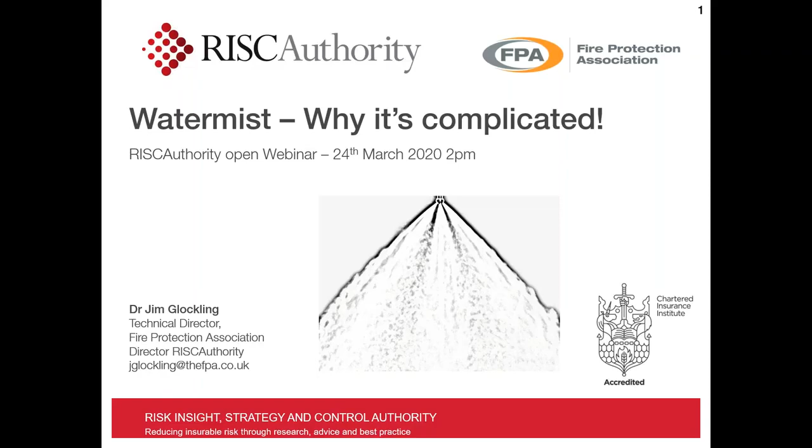Those who know RISCAuthority will obviously know we have a declared bias in terms of business and property protection, in that we seek resilient systems, things which are dependable since they underpin insuring.

Right, so without further ado, the learning objectives, requirement for the certification. We're going to go through what is Watermist, why it's different to other forms of suppression. And I hope if you take nothing away from this, it'll be that it really is different in the way that it operates. And that really underpins why it will always be complicated to specify and to prove.

Also the importance of establishing exactly what the protection objectives are, operational dependencies with other systems, and how your selection might be influenced by whether you're looking for life safety, property protection, or some other remit to fulfill. So often we see this being left out. People put in a suppression system or an extinguishing system without actually really thinking about what needs to be achieved should it ever be required in anger.

We also need to address the issue of equivalency, and this is because when we look at our building regulations and how some suppression systems are referenced, often they will cite sprinkler systems and ask for equivalency if a different type of system is to be used. And that's very important, specifically for those who are protecting the built environment and particularly for life safety objectives.

Now, RISCAuthority has put in a lot of work trying to clarify the situation for people. I'll go into that, and also provide some basic rules of thumb. Now, these are really things which people may disagree with, but we found that they hold true when trying to specify good systems.

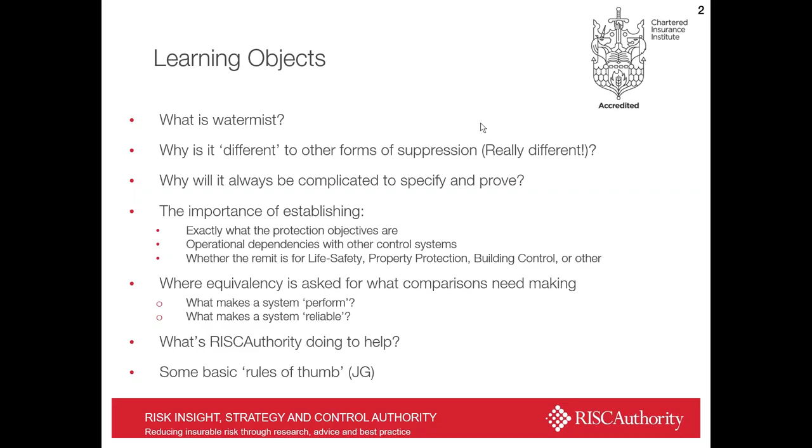So what is Watermist? Essentially, it differs from things like sprinkler systems because the water droplets are very finely divided, much smaller. And in doing so, that gives them an amazing surface area for the exchange of heat and mass. So if you want to change a lot of water into steam very quickly, the first thing you do is cut it up as fine as possible and make it available for boiling off.

This is the difference between a Watermist system and a sprinkler system. In order to achieve this very fine subdivision of particles, these systems generally operate at much higher pressures than other traditional water systems. For this, we might use compressed gas or high pressure pumps.

The mode of operation is generally described as partly thermodynamic cooling of gases during the evaporation process of water into steam, and oxygen reduction as this steam displaces oxygen from the compartment. But many other factors will also come into play, and I'll show you in probably more detail than is healthy during the course of this talk.

These systems can be implemented in a number of forms. Traditionally, they've been what we call deluge systems, where the heads will not have a sprinkler bulb or glass frangible bulb in them, but will actuate on an open pipe system when the pump is switched on. These can be operated on a compartment or local application protection.

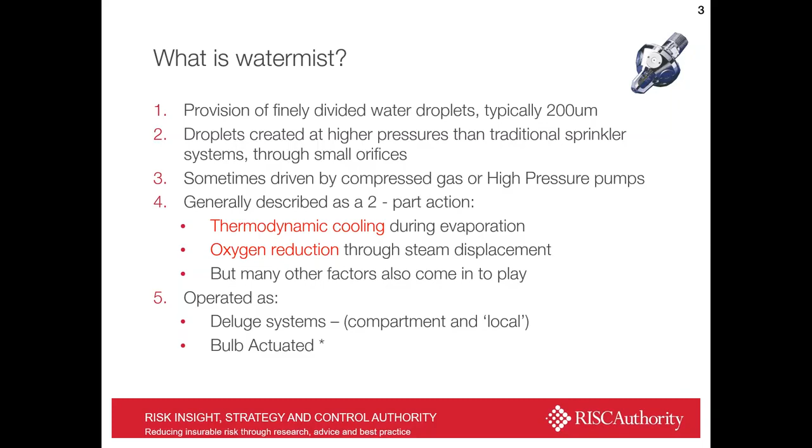So, first of all, why is Watermist different? I do apologise for putting up a picture of the fire triangle - nearly every talk on fire starts with it. But I'll be as succinct as I can.

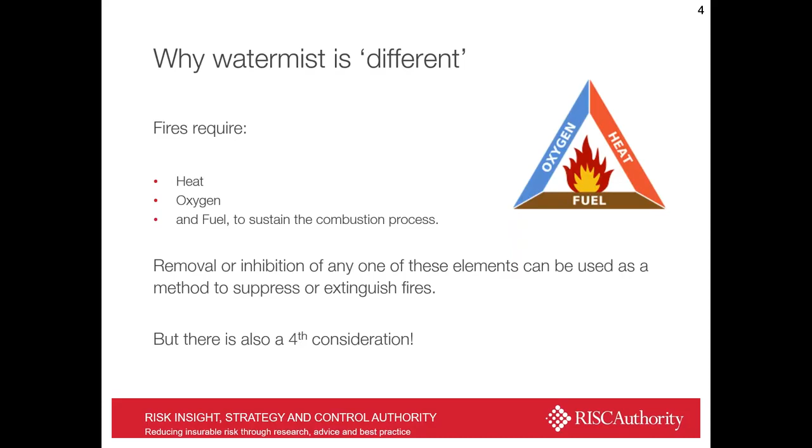We all know that fires require heat, oxygen, and fuel to sustain combustion, and so any suppression system that comes to the fore is going to act on one of those. But it's actually a little bit more complicated than that, because we also need to consider the chemistry of combustion.

So you may be more familiar with the fire tetrahedron. Really this is about interrupting the chemistry of the combustion process itself. Whilst we might be used to our O-level chemistry telling us that hydrogen and oxygen mix to make water in a simple equation, in actual fact, it takes place as a series of steps where bonds are broken and remade between the various compounds involved.

And while they are in this heightened state of being split up, they form free radicals. In suppression terms, there is an opportunity for other molecules to be introduced to steal these, so the chemistry of combustion can't complete. This is probably the most familiar action we'll move on to think about with some of the gases which have historically been used for fighting fire. So we can really address fire by limiting oxygen, limiting heat or fuel, or interrupting the chemistry of combustion itself.

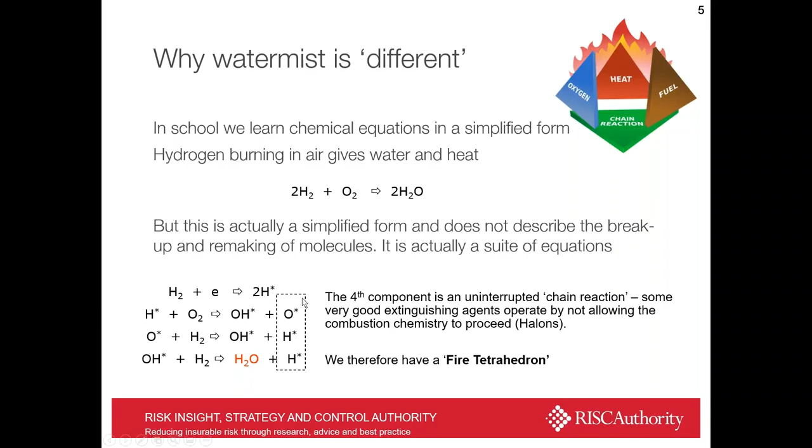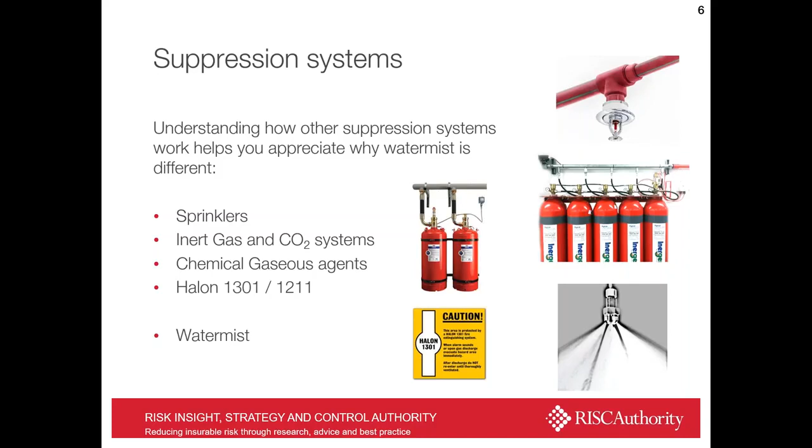Now, I thought it might help to understand how Watermist works by first looking at other suppression systems very quickly - the popular ones being sprinklers, inert gas systems and CO2 systems, chemical gaseous agents, and the traditionally used gases such as halon 1301. This may help us understand a little bit how Watermist works in its own right. So, looking at sprinkler systems, often people are slightly confused about how sprinkler systems work.

We're very used to thinking we put water on fire and the fire goes out. But actually, when it comes to things like sprinkler systems, generally they are fuel removal systems. Generally what they achieve is making stuff that would normally burn, not burn. So in the case of solid fuels like cardboard, dry cardboard is a fuel, wet cardboard isn't. And a lot of sprinkler protection is about pre-wetting the fuel that could soon become involved in a fire.

And that determines how water is discharged from them. Now, if you're protecting some liquid fuels even, this can still apply.

Alcohols mixed with water, at a certain percentage, will burn, and below a certain amount of dilution, they will cease to be combustible. So dilution of alcohol fuels to the point where they become non-combustible still classifies as fuel removal.

For other types of Class B fuels, like petrol and diesel, additional chemicals can be added to the water entering the sprinkler system, such as firefighting foams, which render the fuels non-combustible or separate them from further participation in the fire by a physical barrier, a skin, or a frothy layer. They also remove heat directly from the seat of the fire, but in common practice for sprinklers, the area will burn out where the fire initiates, because you've made the surrounding product non-combustible by the flow of water over it or the absorption of water into it.

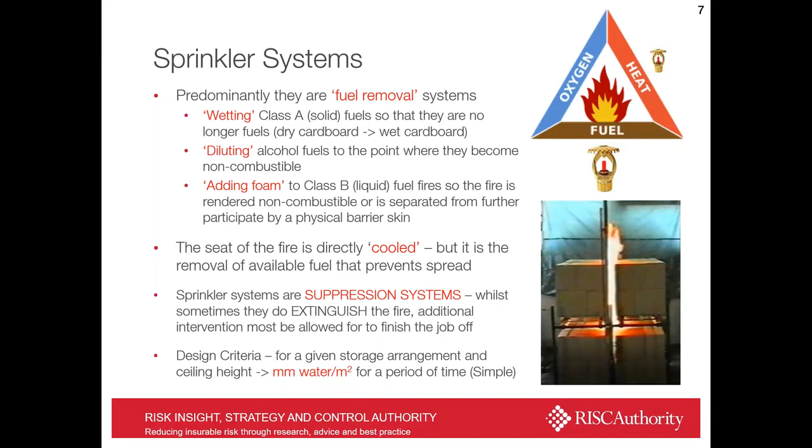If we look at the equivalent for gaseous systems or inert gas type systems, these are oxygen removal systems, where the inert gas displaces around 40% of the enclosure's volume, leaving a residual oxygen concentration that doesn't sustain combustion. For typical fuels, that will be somewhere around 12% oxygen and below. There is some slight variation in performance between different gas mixtures, because introducing additional quantities or changing the makeup of air transports heat differently, so there are some differences in performance between the inert gases, but they are very minor.

Gaseous systems can't really be suppression systems. They need to extinguish the fire in order to fulfill their remit, and for that, inherent in the design will be precise control over the environment in which they operate.

We need to ensure the compartment is sealed so the gas doesn't just dissipate out. We need to ensure that at the time of discharging the gas, we don't destroy the enclosure. When you inject these gases, if 40% of the compartment's volume needs to exit, it needs to do that in a manner controlled to an appropriate location and that doesn't raise pressures inappropriately. Then, having discharged it, there need to be mechanisms to seal the enclosure and ensure you can hold on to that gas quantity.

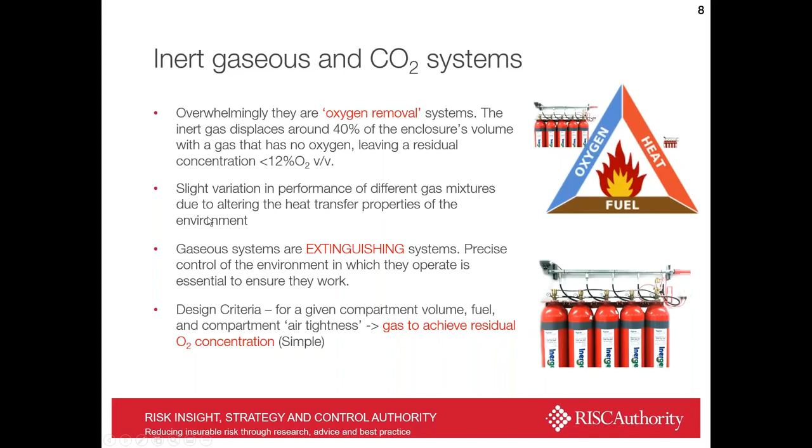So, very straightforward, but a little more complex with chemical gaseous systems. These are, if you like, a gaseous version of water, in that they can remove substantial quantities of heat by breaking down chemically within the fire. It's a highly endothermic reaction, and there are reports that some of these chemicals also inhibit the chemistry of combustion. Popular trade names you might have heard of these types of gases might be FM200, FE13, NAF-S3.

Many are becoming slightly less desirable due to the greenhouse gas contribution they can make. But these are extinguishing systems, and they need to extinguish the fire to fulfill their remit. Because generally they're fluorinated compounds, if you don't extinguish the fire with these chemicals, it can lead to massive production of hydrogen fluoride, a very toxic and damaging gas. But the design criteria is very simple: for any given compartment volume, fuel, and sealing level, you're just looking to achieve a residual agent concentration of a certain value. So again, very simple design.

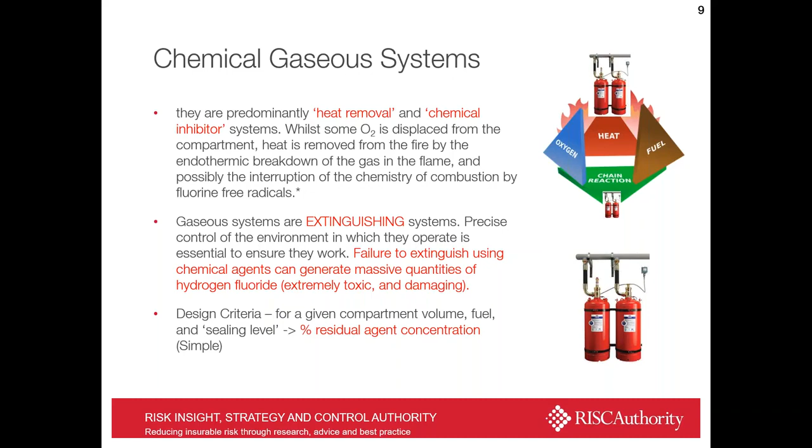And just for completion, halon systems. Halon gases were highly revered chemical inhibiting agents, which in terms of efficiency and performance at putting out fires were quite unsurpassed in their capability. They're now outlawed under the Montreal Protocol because they're ozone-depleting gases. It was their cessation that really led to the development of the other gaseous systems we've just discussed, and also gave birth to increased interest in the use of water mist, prompting a great deal of research into this. The design criteria for halon was again very simple.

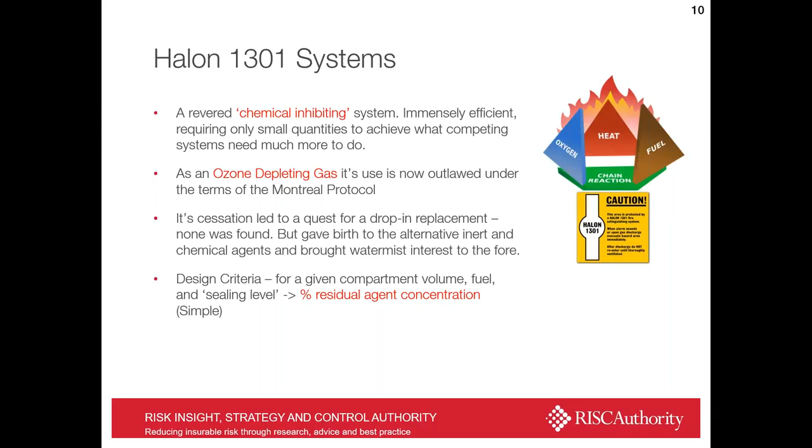So what about water mist? Perhaps it's best described as though it's an inert gas system, but in this case the inert gas is steam, and that must be created by the fire itself. It's this complexity that makes it different from any other extinguishing system, because how it works, how well it works, and the way it works is driven by the fire itself, and not just by the fire, but the relationship the fire has with the enclosure it's within. Scale becomes a very important factor here - a big fire in a small compartment might behave very differently to a small fire in a very big compartment, and even during the life cycle of the fire, these properties can change as it grows and shrinks.

Now, in sealed environments where the fire and geometry allow it, it is most certainly an oxygen removal system, and you can achieve great things where the steam displaces oxygen from the enclosure until combustion can no longer be sustained. It can be an extinguishing system, but this can be very difficult to ensure due to the level of control you need over the environment and how everything goes. I'll demonstrate that clearly shortly with some results from experiments we conducted to show these points. It's obviously a very effective gas cooling system.

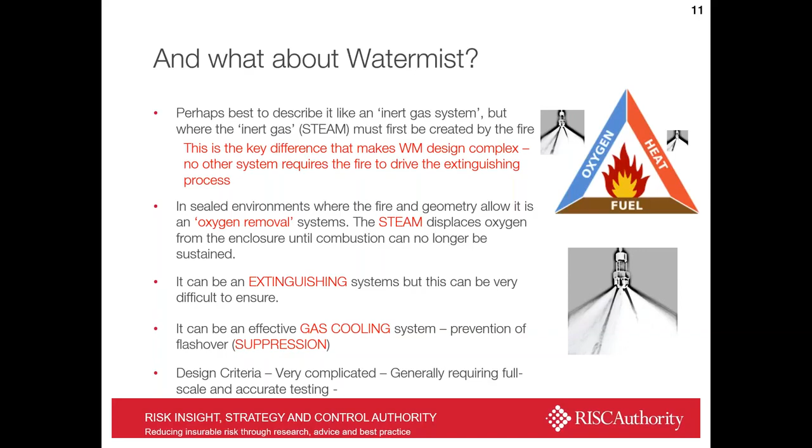We do see that cycling of fires during water mist discharge is commonplace also, as a large fire can really drive itself to the point of its own destruction, or nearly so, but then as it shrinks down it starts to generate less steam, and then, depending on the ventilation arrangements, it may recover quite considerably also.

But another common question is, is it like a sprinkler system or a gaseous system? Sometimes all I can say is it's a bit more like one than the other, but again it depends very much on the situation. The key difference is that the fire and its relationship with the enclosure drives the extinguishing process, and all these things vary.

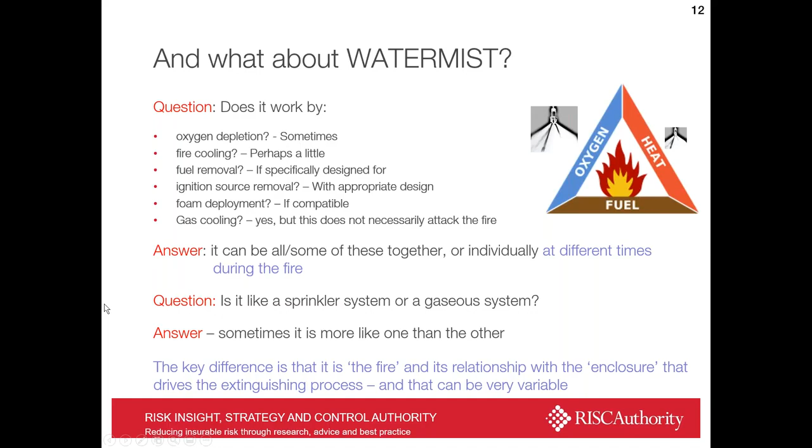So I said I would give you a good example on some of these facets. Here was a very simple series of tests, but very well controlled, in a 100 cubic meter enclosure, a very well sealed rig, but we can adjust the ventilation by removing sections of the door panel, the blue blob on the left with those dots. We can operate with different numbers of watermist nozzles, use a range of fire sizes, and allow the fire to burn for different periods of time before the watermist system operates. Hopefully the results will show you clearly how counterintuitive some of the operating modes are.

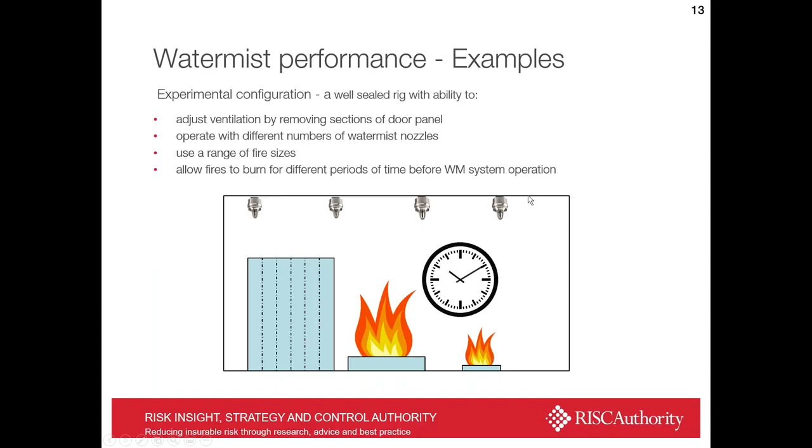So if we look at how long the fire has been burning and how that affects performance, there are two graphs here. On the left we have the temperature in the enclosure, T0 is when we release the watermist system, and on the right we see the oxygen in the compartment itself, with two oxygen sensors in there.

What we have here are two fires which are identical, with identical ventilation conditions. The only difference is that we allow a pre-burn time, a detection time, to be longer for one fire than the other — you see that in the solid black line on the left-hand graph. The consequence of burning for longer is that the mean temperature of the enclosure is higher, 295 degrees as opposed to 258 degrees.

The other consequence of allowing a fire to burn longer is that it consumes more oxygen from the enclosure before the system operates than a shorter pre-burn time. At its lowest, high up in the compartment, it reaches about 8% oxygen, just over, whereas with a 3-minute pre-burn time it's 10%. When we activate the system, we see a difference in time to extinguish: burning the fire longer extinguishes it in 10 seconds, whereas a shorter burn time takes 45 seconds to go out.

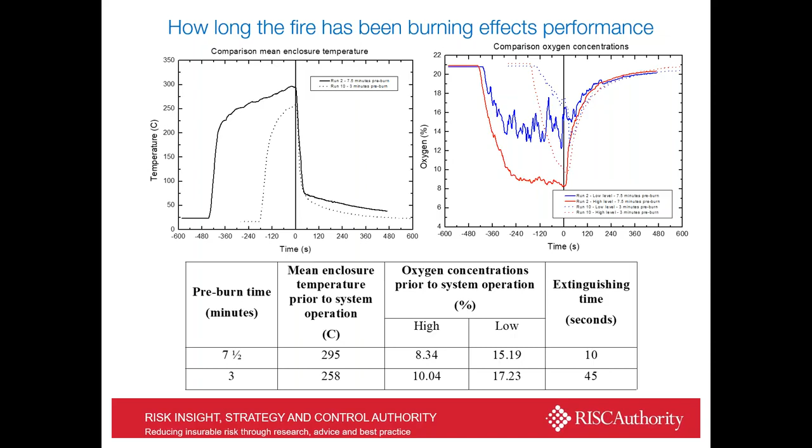Hopefully that's all very logical, but again counterintuitive. We're rather used to detecting and tackling fires earlier because they're easier, but here's a case where leaving them longer makes them easier to extinguish for this type of system.

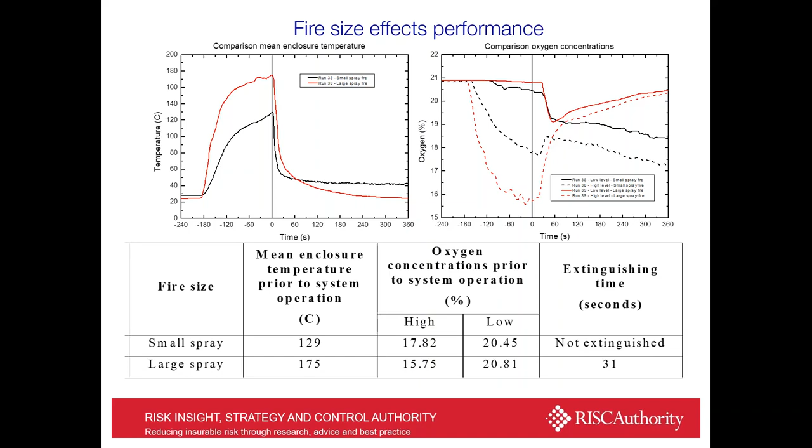The difference here is not just a change in time — for this ventilation configuration, it's the difference between extinguishing the fire and not extinguishing it. This is again a deviation from what we're used to. We're used to systems which don't behave in a binary fashion; we like to see a change in performance, but not a major difference such as whether it gets extinguished or not.

Ventilation is another key feature for systems such as this. We can see they're inherently linked, in their ability to put out fires, to the oxygen content of the enclosure and how they can drive it down. So here, if you remember the schematic before, I've removed a series of vent panels — 2, 4, 6, and 8. What that changes between these tests is not only the temperature of the enclosure, because the fire burns less efficiently.

We can see that in the left-hand graph — actually this is more about holding on to heat, with the highest temperatures for the least panels removed. But more importantly, on the right-hand graph, it describes the residual oxygen concentration within the compartment for the different ventilation levels. As we increase the ventilation of the compartment, you can see the extinguishing time increase from 14 to 27 to 35 seconds, to the point when 8 panels are removed, it doesn't extinguish at all. So again we reach a threshold, and it's a question of whether we'd be able to describe accurately in any design manual when this happens, if extinguishment is an important facet of the overall design.

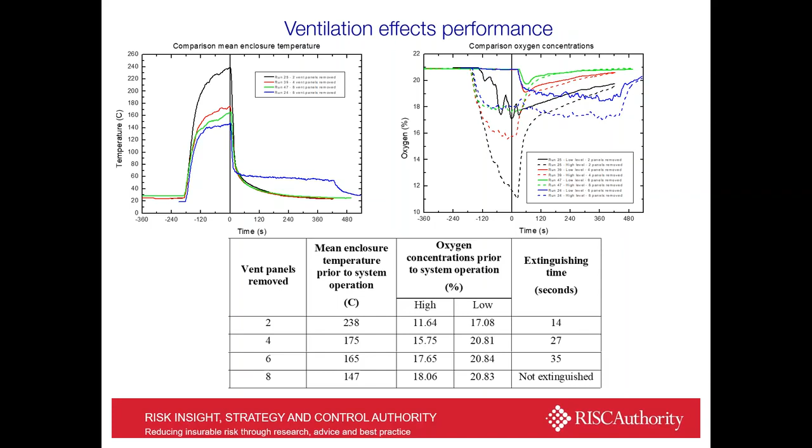And that's another thing we need to discuss later in this talk — people do seem to fixate on extinguishing fires, when actually that might not be what is needed at the end of the day.

Watermist density - we can also change the number of nozzles operating within a compartment in this well-controlled environment. You can see as we change from 4 to 6 nozzles on small and large spray fires, not surprisingly, the more water you put in, the lower you can drive down the oxygen content of the compartment. Larger fires do that better.

We've already seen that. But on a small spray fire, with 6 nozzles operating, the fire will be extinguished in 52 seconds. But if it comes down to just 4 heads operating, we reach a threshold where the fire doesn't extinguish.

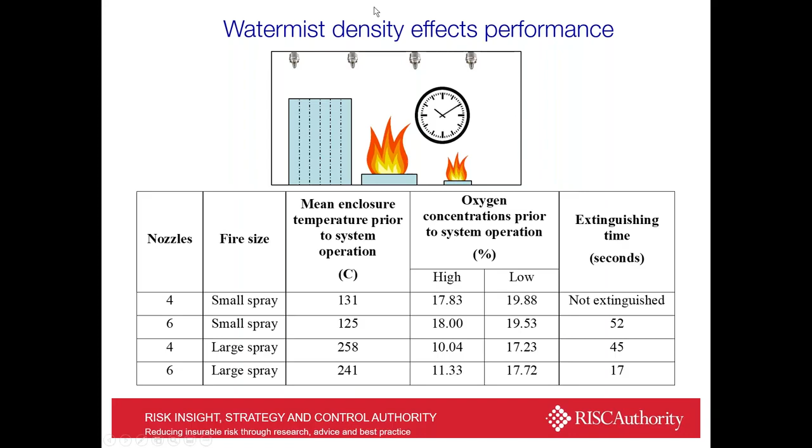So hopefully you've managed to get your head around that - it is confusing. It demonstrates just how confusing things can be. Fires that have been burning for longer are hotter and have less oxygen available, and may therefore be easier to extinguish. On the other hand, fires which are bigger are hotter, consume more oxygen, and can generate more steam, and again may be easier to extinguish.

Fires with less ventilation cannot replace the oxygen displaced by steam as quickly, and may therefore be easier to extinguish. And fires subjected to more droplets can produce more steam, which may benefit extinguishment also.

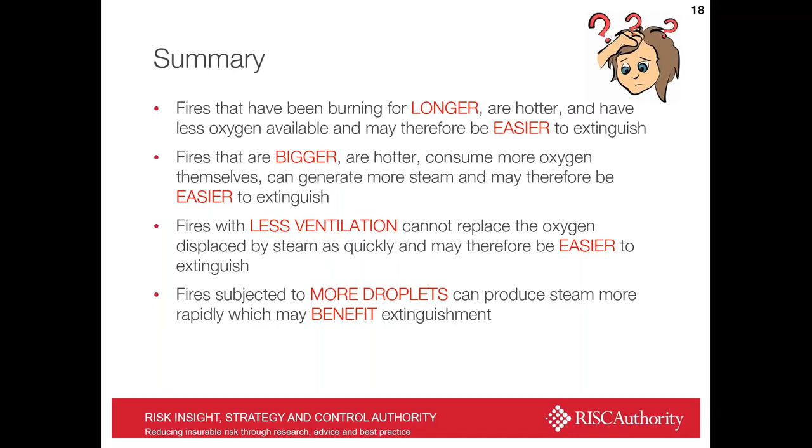So the problem with criteria like this - longer, bigger, less ventilation, more droplets - is these are very difficult things to describe in any given design manual, because they are related to fire size. A big fire is only big in a compartment in which it looks big. In a much larger compartment, it may be a very small fire. So it's this interplay that makes it very complex indeed.

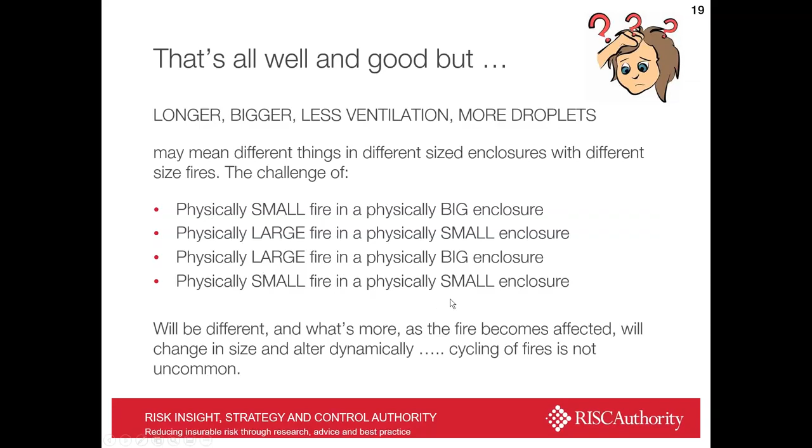But I think we've probably laboured that point long enough. I just want to show you what this actually looks like in practice. This is some work we did for the military, and I want to show you 3 examples. This was for a very specifically designed Watermist system for them. I'm hoping this will run.

This is where it worked beautifully in rehearsal. But we might be having a little problem now. Sorry about that - I may just have to describe these to you.

Basically, in a very large compartment, this was for a marine application - we designed a system for the military, for warships. In the first video on the left-hand side, that should have been showing you how hidden fires, under a metal table, are tackled. These images are taken with thermal imaging cameras - a very large fire in a completely obscured situation. If the fire is large enough and the compartment is well sealed enough, that fire can be successfully tackled because of inerting of the atmosphere and reducing the oxygen to a point where combustion can no longer be sustained.

In the middle one, this is a small fire, but in this case the ventilation of the enclosure is such that the small fire will not go out by itself. This particular Watermist system was enhanced with foam, so that gets taken care of by foam.

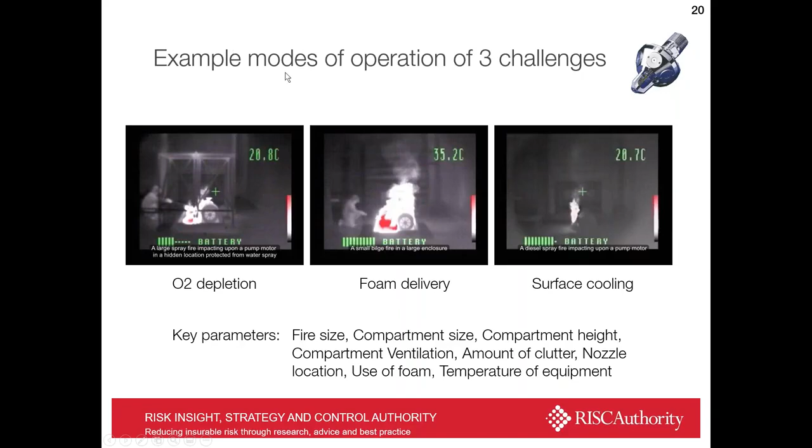And I also don't, oh, there we go.

To recap, a very special set of circumstances need to exist for water mist to extinguish fires effectively, robustly, and reliably, but they are very good at cooling and preventing flashover. Suitability can therefore be very different for different applications, and whether extinguishment is a requirement or not.

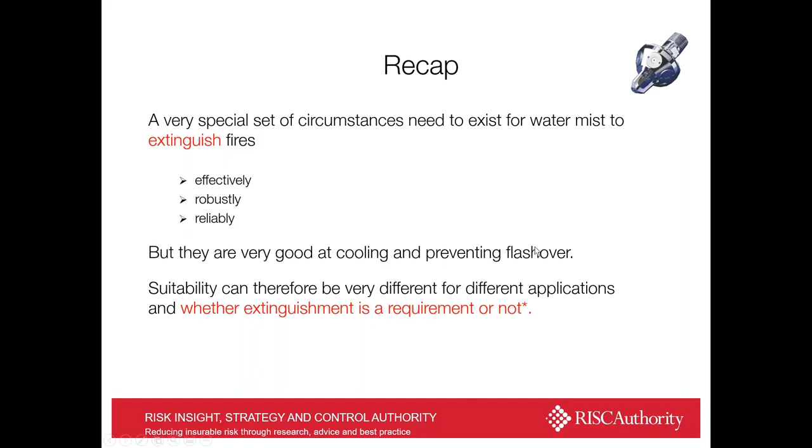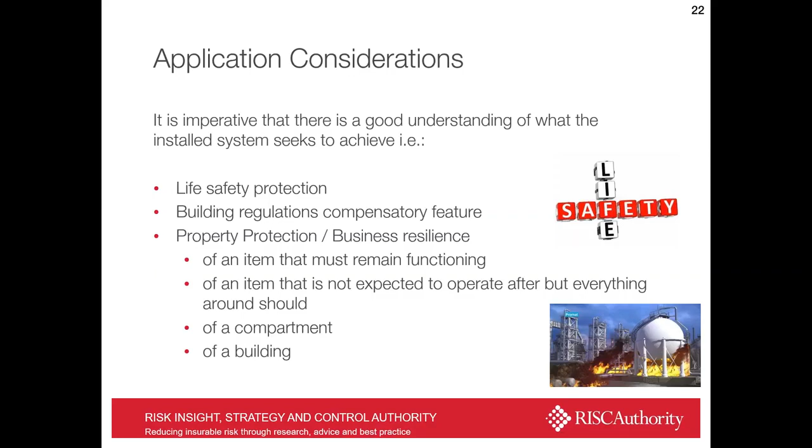We need to consider this very carefully. Water mist is seeing a wide range of applications, some more familiar than others, but it's vital that you understand what it seeks to achieve. I've roughly categorized these as life safety protection, building regulations compensatory feature, property protection, and business resilience endeavors. That might be an item which must remain functioning, local application if you like, or an item where it may be destroyed in the process, but that's okay as long as everything else around stays intact, or protection of a compartment or protection of a building.

For each of these, it's imperative to also consider if extinguishment or suppression is appropriate, and if we talk about suppression, how long the system must be effective for. This is generally a conversation about who's coming up to help with it - the fire service, or what the secondary measures are coming to finish off the fire - and also how resilient the system must be to perform.

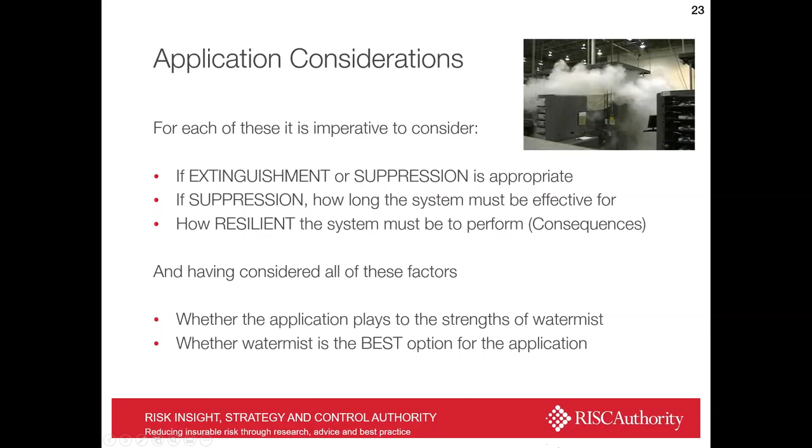Having considered all those factors, we need to assess whether the application plays to the strengths of water mist, and we'll talk about those in a moment, and whether water mist is the best option for the application itself.

I think hopefully you start to get a good handle on what the strengths are of water mist. Very good on high heat output fuels, particularly liquid fuels, hot environments, enclosed environments - this optimizes steam production and containment of that steam for displacement of oxygen as well. Best for small compartments with low ceiling heights, because that can also maintain the momentum of the droplets themselves.

Around a fire, there are a lot of repelling forces to drive droplets away, and water mist systems overcome this by generally injecting them in a fairly fast and furious fashion so that they can overcome these repulsive forces. Certainly a strength is direct application, very good environmental cooling, and they can be good on hidden fires if the fire is large enough and the compartment small enough in relation to each other to globally reduce oxygen content, and they're very good at gas cooling.

The weaknesses: ventilated spaces, as hopefully we've demonstrated there - you can cross a threshold so that a lot of the benefit disappears all too quickly. High ceiling heights, where the momentum of the droplets gets lost with distance. Small fires can remain remarkably resilient against water mist systems, because they don't have the energy to drive the circumstances for their own demise.

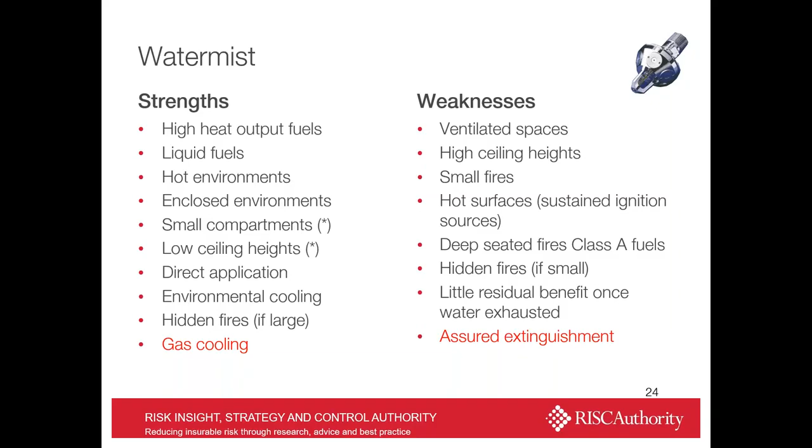They're not necessarily very good at cooling hot surfaces, not necessarily very good on deep-seated fires in Class A type fuels, which, as we know with sprinkler systems, might require wetting the fuels. Hidden fires, if small. Another thing to consider is that once the water supply to a water mist system is exhausted, there can be little benefit thereafter, because such a very small quantity of water has actually been put down. Their weakness is really that assuring extinguishment can be quite a challenge, and we'll keep revisiting that.

But that said, for life safety purposes, we've seen some very good implementations. We know that they have the facet of exhibiting excellent atmospheric cooling, very good for flashover prevention, and really preventing fire growth in small domestic residences. It's an aid to timely detection and evacuation, and generally these are specified without an expectation or requirement for property protection, as extinguishment is not required. It's more about getting people out of the building, and they can do that very effectively indeed.

Obviously post-Grenfell, they've been proposed as a good measure for assisting the escape of occupants who can be quite remote, high up in high-rise buildings, and we've seen some good examples of where that certainly is a feature.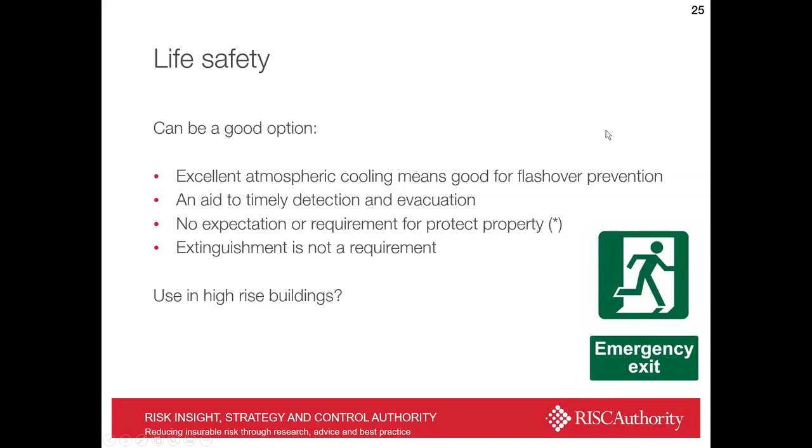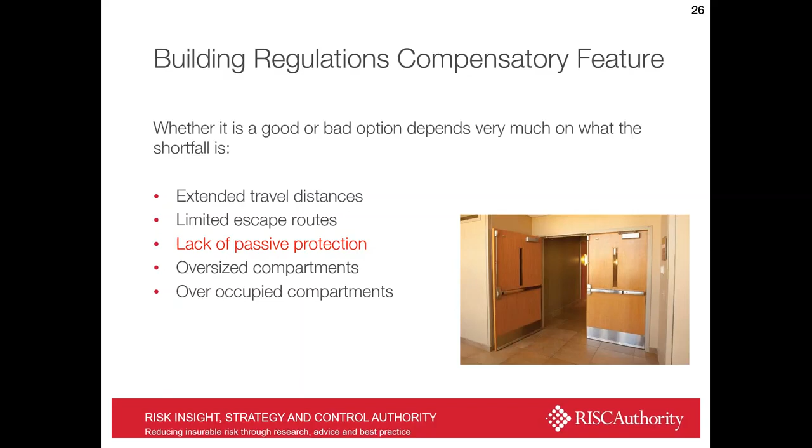Now, building regulations compensatory features. This is where the building regulations can't necessarily be applied in full, so other measures are made to compensate. These may be things like extended travel distances, limited escape routes, just single stairwell, lack of passive protection—very topical at the moment—oversized compartments or over-occupied compartments. I think decisions as to whether Watermist is appropriate here really depend very much on considering each of those in turn for appropriateness, given the strengths and weaknesses of what we've already discussed. But I won't dwell on those. It's a very complex area in its own right.

In terms of property protection, for local application property protection—that is protecting an item of equipment—Watermist is often the very best option. In some marine and high-risk environments, it's a good option too. The reason there is quite obvious: in the marine environment we have very well-sealed compartments, and the fuels they use generally lead to very large instantaneous fires. It all plays to the strengths of Watermist, as we've seen it being very effective.

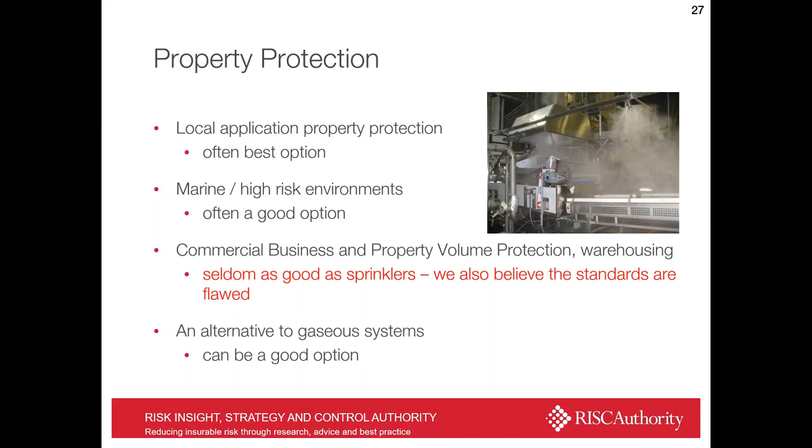The grey area, I would say, comes when we look at commercial business and property volume protection. These are really the domain where sprinklers are used—warehouse storage and the like. This is where we see most challenges, and often we see them putting in facilities where really sprinklers would have been a better choice after all. I'll go on to some of the reasons for that later on. But certainly they can also be considered as a practical alternative to where gaseous systems might be deployed. They can be a very good option, subject to the fires being of the right type to play to its strengths.

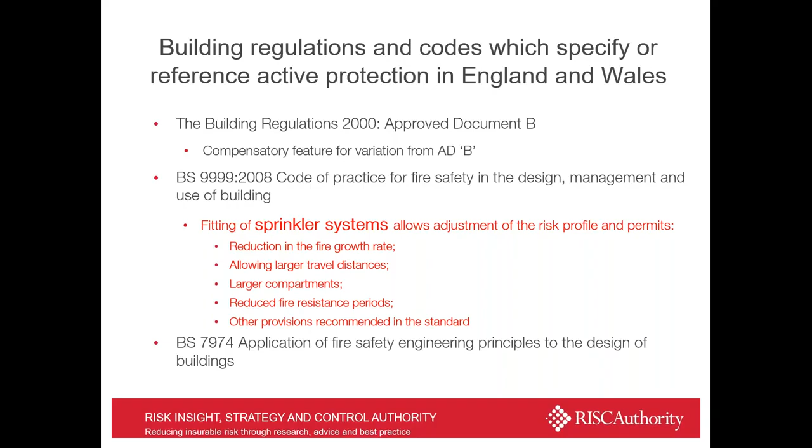I won't dwell on this, but building regulations do talk about water systems, generally in terms of sprinkler systems, as we said before. They can be used to compensate in various codes, to reduce the fire growth rate, allow larger travel distances, larger compartments, reduce fire resistance periods, etc. And where they have been mentioned—this is a phrase out of BS 9999—it says where it is proposed to modify the risk profile by using a fire suppression system other than a sprinkler system, it will need to be demonstrated that this system achieves the equivalent standard of fire protection and reliability.

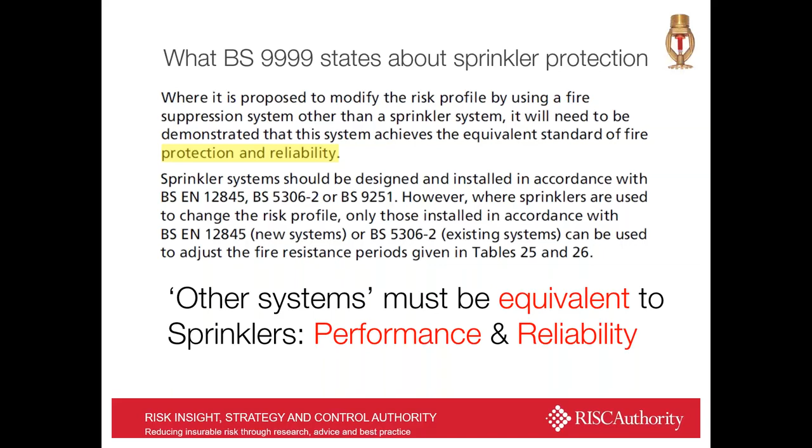Now, the fire protection bit is quite easy to generally demonstrate in the laboratory—you can tweak and play with any system to make it good. But reliability is a very different thing altogether, and that is generally earned through really kind of over the years of refining, tweaking to increase the development of pedigree, I suppose, of a system. But if we hold on to that thought, we probably need to consider what makes things reliable.

Now, I don't want to enter into a sprinkler versus Watermist debate, but it's sort of inevitable in some respects to visit here. It's a good benchmark because sprinklers probably are the most reliable suppression system that we have. Generally, when asked to operate within the figures, most analysis show them to be over 90%, 96% likely to function properly when called upon to do so, which is an enviable figure which no other type of suppression system comes close to. But in the early days, sprinklers weren't perfect either, though most problems have now been resolved.

By specifications for equipment, specified clearances between moving valve parts. It's often a criticism that sprinkler systems look like Victorian architecture, but it's with good reason—that actually brings resilience into their whole operation. Size limits, minimum size limits on various orifices, and that overcomes a lot of the water quality problems that we have. But 8 millimeters—these are quite large orifice sizes.

Continuous refinement of how we design systems and install them. Certainly RISCAuthority alone spends hundreds of thousands of pounds trying to refine our rules to maintain this level of reliability of the systems. They have good specifications of how to design against a range of hazards, and water supplies are very secure, reliable, and incorporate duplication also.

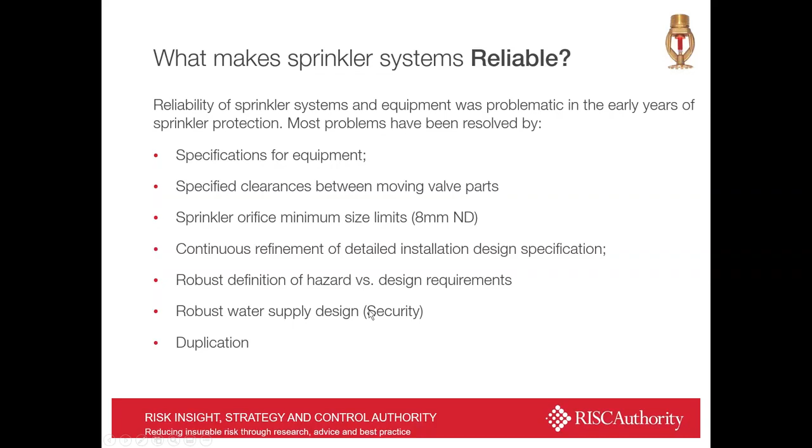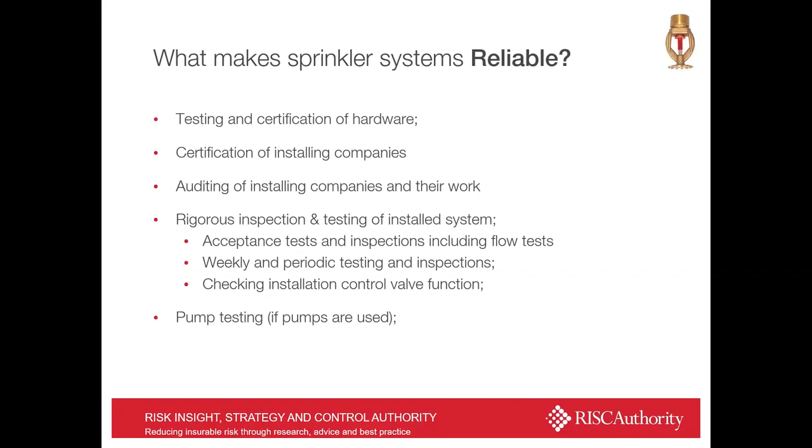There's also testing and certification of hardware, certification of installing companies. There's auditing of the installing companies through things like the LPS 1048 schemes and FIRAS schemes. There's also rigorous inspection and testing of the installed systems by way of acceptance tests, flow tests. There are weekly tests done, pumps are run up each week as well, and there's checking of installation and control valve function. So as you can see, it's an all-through-life solution that has been required to produce reliability within sprinkler systems. But even then, we still find problems, albeit rarely, but it does take a lot to achieve these levels of security.

I just want to do a few side-by-side comparisons. Probably one of the primary differences between sprinkler and Watermist systems is actually the extent of protection.

When I'm confronted with people saying they don't know whether to put in a sprinkler system or Watermist system, it's more than just talking about the technology and methods with which it puts out fires. In specifying a sprinkler system, you are signing up to a list of rules that tells you every area of the building that has to be protected, even the hidden areas, the voids, the cavities, if they contain combustible things. It is basically a total building protection system you're signing up to, not just the fact that you're using a nozzle that puts out big drops.

But when you specify a Watermist system, it really is for compartment protection, and generally it's down to the user to determine what areas, what subcompartments of that building should be protected. So there is a key difference there.

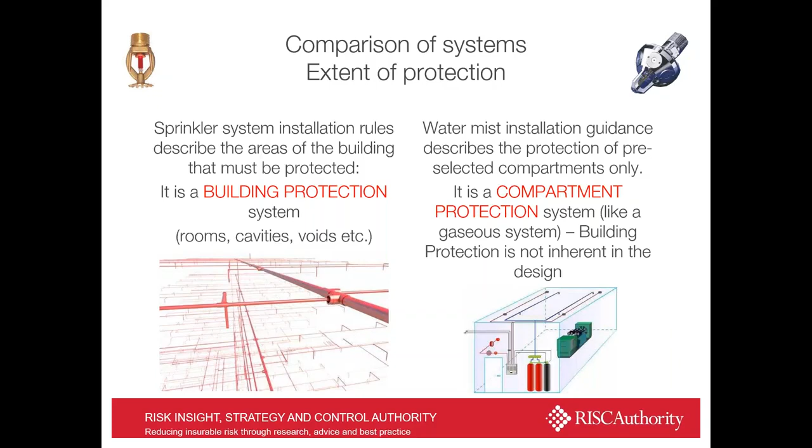With a sprinkler system, if you see one in a building, you'll know that if there are voids over a certain size with combustible content, the sprinkler system will be running in those invisible places too. The same is not inherently encompassed in Watermist design by default.

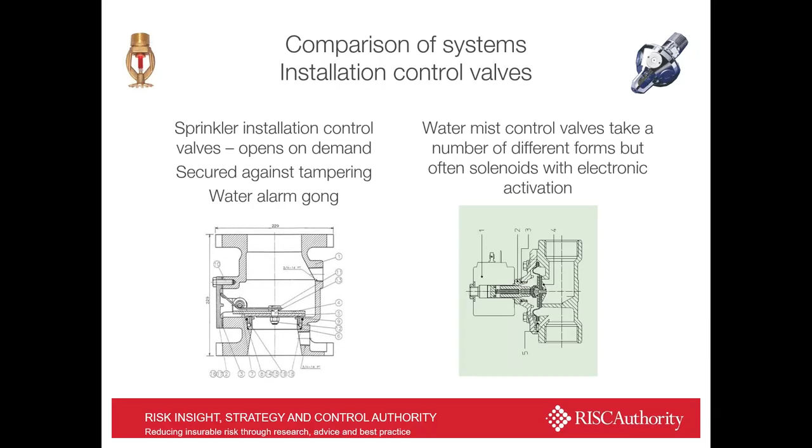And when you look at the hardware that's used as well - I mentioned Victorian architecture on the left-hand side, that's a cutaway of a sprinkler control valve, a large flap that lifts away, generally revealing a hole around 4 inches in size for the water to get through. Watermist systems require much lower quantities of water, but depend on much smaller orifice type equipment such as solenoid valves, which have a much higher failure rate than sprinkler alarm valves.

There's also looking at orifice sizes themselves. We mentioned the minimum orifice size for sprinkler systems is around 8 millimeters, and as such, they get tested every 25 years, and the products are interchangeable. If your system's heads need replacing, you can go to any number of manufacturers and put their head in place of it. Watermist nozzles have very much smaller orifice sizes, and we know in our laboratory, even trying to be fastidiously clean with our water, we do get issues occasionally, and as such these need testing every 3 years, and they're not interchangeable between systems. You do need to go back to the original OEM provider for nozzles if more are required.

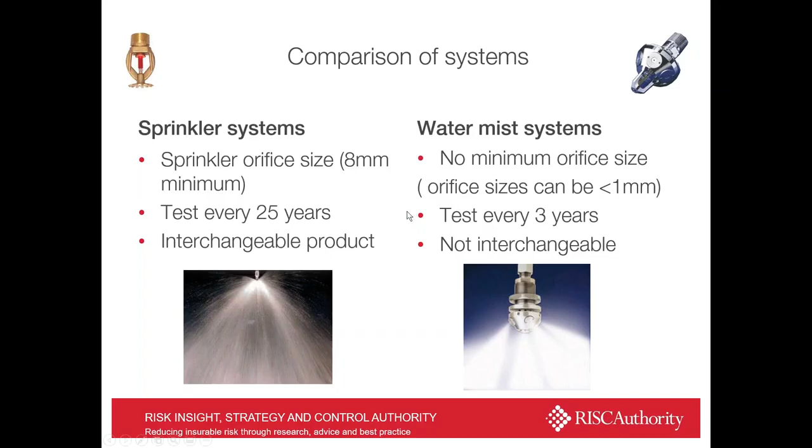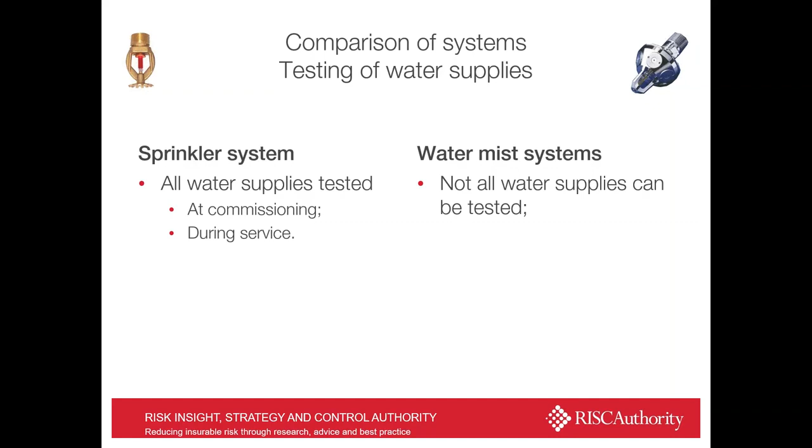Testing of water supplies is also a difference. Sprinkler systems are designed so that we can test the water supplies, and they are tested regularly, and with Watermist systems we find sometimes that's just not possible.

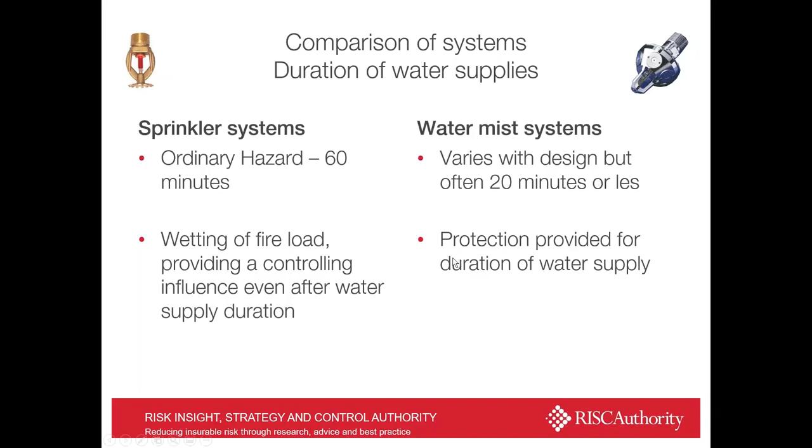Duration of water supplies, obviously for a sprinkler system, is defined by the hazard, but 60 minutes, 90 minutes, even 120 minutes are not out of the question. And even after that water gets exhausted, were it ever to, the amount of water that's gone down can still have a controlling effect on the fire. In Watermist systems, the durations are generally very much smaller. They may be defined by a standard, but often by the installer or manufacturer themselves, determined through testing. But in putting so little water down, once the system generally finishes firing, there can be little residual protection of that space thereafter, if nothing else has come along to intervene.

And then finally, water application rate - we've got it specified against hazard for a sprinkler system, and as I've already described, it's really dependent on the system itself for Watermist, as few equivalent type test procedures apply.

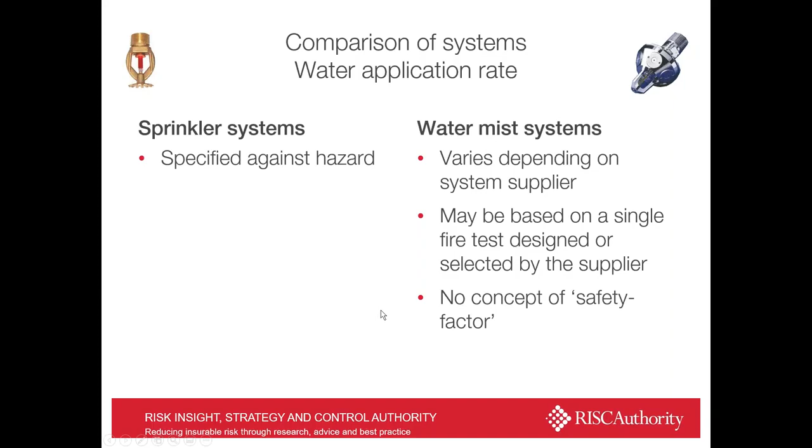So, sorry, in that slight whirlwind, I hope it wasn't too confusing - look at what makes reliability and performance. Currently there's little by way of codes or standards to ensure Watermist systems will have many of the features that we know make sprinkler systems effective for the long-term protection of property and business.

I have seen justifications of Watermist systems which have basically said that sprinkler systems are made of a tank, a pump, lots of pipe work and the nozzles, and they're 96% effective. Our Watermist system essentially is made up of a tank, a pump, some pipe work and some nozzles, so we can infer the same level of reliability. Totally wrong, but I do see it written down occasionally.

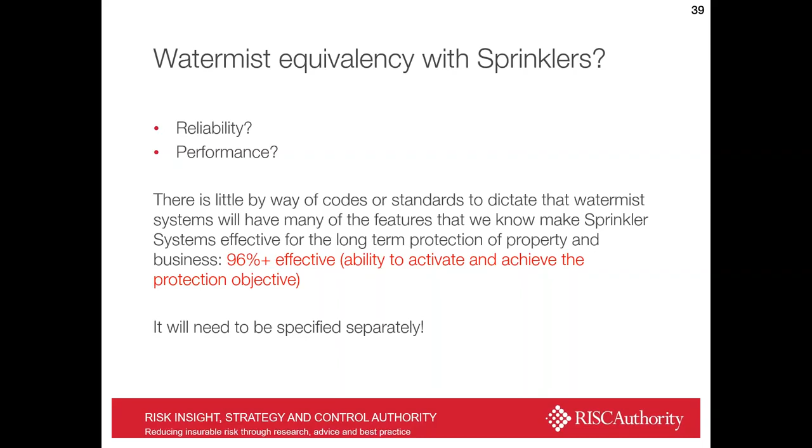So what's RISCAuthority and FPA done about this? Insurers, and many of you are listening in I'm sure, sought some guidance as to how we could help while there is a lack of guidance out there.

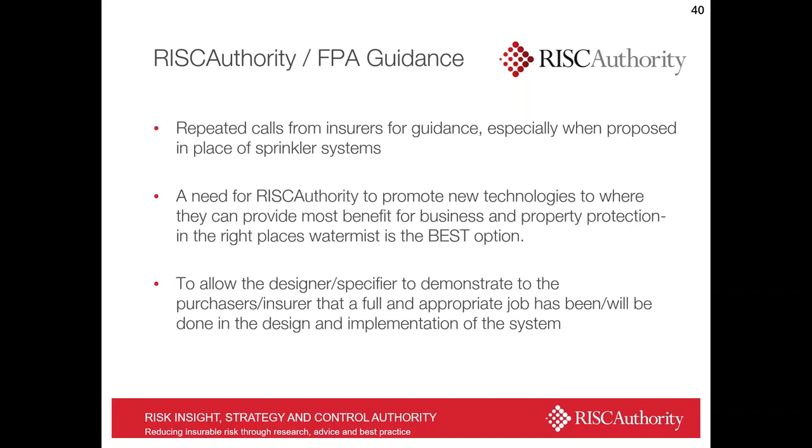RISCAuthority does have a remit to promote new technologies where they can provide most benefit for business and property protection, and we like to see it go into the right places where it's actually the best option. And what we've produced are a suite of questionnaires which hopefully will allow designers and specifiers the freedom to really demonstrate to the end user why this is the best technology to use at any given time.

These are freely downloadable from the RISCAuthority website. There are three of them to cater for the three types of Watermist system that we see being installed.

IQ1 is a Watermist questionnaire for building compartment deluge systems, so that's the use of open head nozzles used to protect compartments in the same way that a gaseous system might be used. These are typically things that we see in some factory environments, but certainly greatly in the marine environment. IQ2 is a Watermist questionnaire for local application systems, protecting deep fat fryers and cooking equipment, which can be very effective there. And IQ3 is a special one.

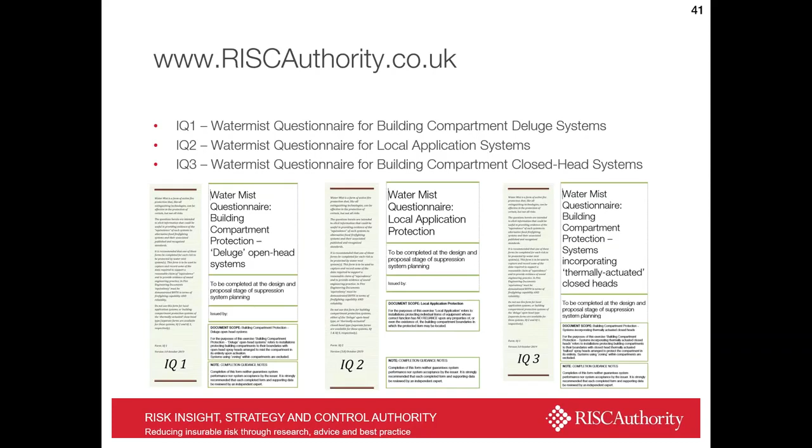This is a Watermist questionnaire for building compartment systems which use closed head systems - these are things with bulbs in them. And there's some very good reasons, which I'll explain very shortly, as to why we think that's important.

Why have we done questionnaires and not produced guides or installation rules? Well, Watermist function is complex, as you've seen, and there are fewer standards than there are for sprinklers existing to rely on for their installation. The science is quite complex here, and to describe every eventuality is almost impossible. But what the questionnaires do is they check that all the design elements have been considered, that the usual risk control logic has been followed, properly recorded, and is owned by someone. We felt that was the only practical approach to take.

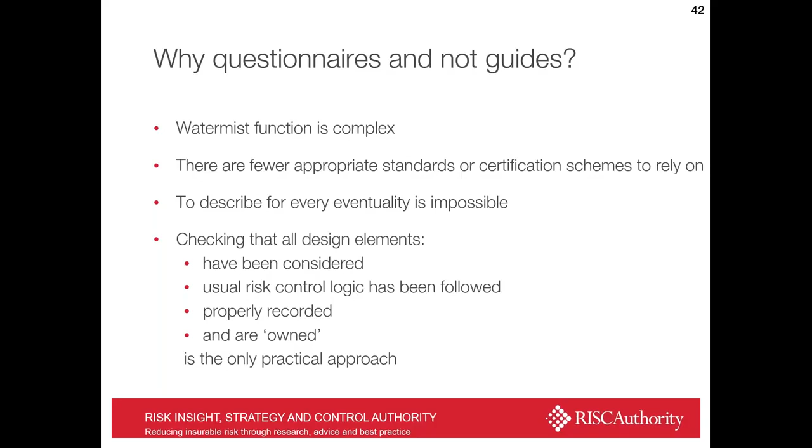Now, based on some of the things that we've seen when we've been doing forensic examination of failures of all types of suppression systems, not just Watermist, the first and key one is that design intention is not properly understood - be it about whether it's a relationship between property protection or life safety. We do see things more fundamental than that, an assumption that the system would extinguish the fire, but actually it didn't, and it wasn't associated with an alarm system. So not only did it not extinguish the fire, it also didn't raise an alarm that there was a fire, and then the building carries on to burn down anyway. These are quite fundamental issues - the risk never properly investigated or understood properly.

We see an inappropriate use of systems applied to different applications, system design never validated against an appropriate risk. We've been through a period where we see a lot of onshore water mist applications being justified by experiments conducted for the marine environment, which uses very different fuels, and obviously the enclosure details are very different also. You need to question whether that is appropriate or not.

Also, a key one is that the system design doesn't necessarily consider all modes of operation of the equipment it's protecting. We've seen some very large losses where the system probably would have worked fine had the equipment been configured as it's normally configured. But then fires don't generally manifest when things are normal - fires happen when abnormal stuff happens, and maybe if a fryer hood has been lifted or something, then the system fails to operate because the ventilation details have now changed.

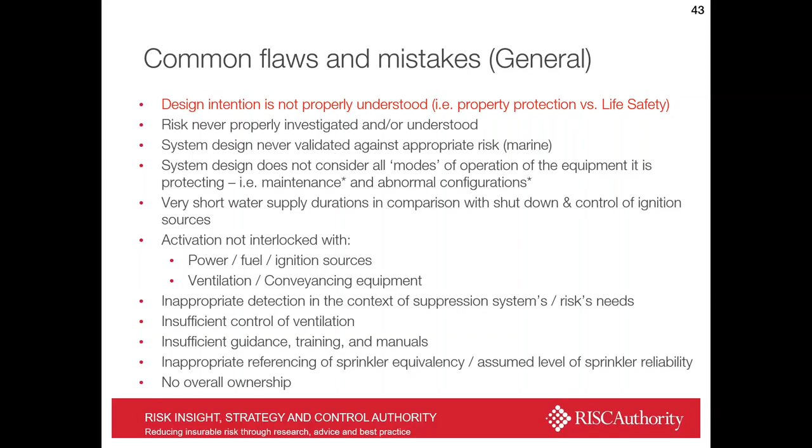But where I do have a concern is when it comes to very large area systems with a large array of heads, which are closed heads, and they are actuated by the popping of a sprinkler bulb.

Now, it may not be known to many people, but sprinkler systems are deliberately designed not to cool the ceiling gas layer, because that is the only means with which the temperature at the ceiling can communicate with the size of the fire below. So if the next sprinkler head in an array needs to understand what temperature the fire is and whether that bulb is needed, the droplets are very large so they don't cool the gas layer, and a great deal of effort goes into sprinkler design to ensure that is always the case.

However, one of the concerns we have at FPA is that in the watermist arena, commercial protection standards have been written which use the same bulb standards and the like, but we mustn't forget these are very small droplets, and these are essentially gas cooling systems. We don't believe sufficient work has been done to consider whether one head activating can impair the ability of the next head to operate, even though it's required, due to cooling of the gas at this height.

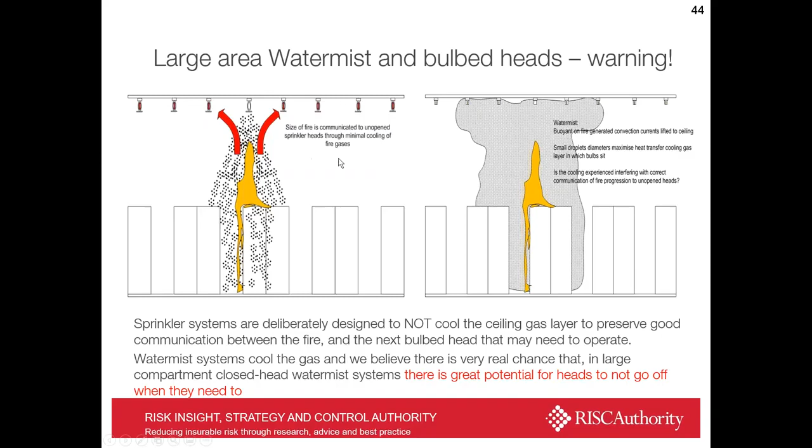So we currently feel that the commercial watermist installation standards for systems of this type should be treated with great caution. So in summary, watermist can be the best protection option for many applications, but not all. It is imperative to fully understand all performance factors pertinent to meeting the design requirements and assessing whether the technology, what it can achieve, is better than all others.

In the use of the questionnaires, it only asks questions that should be answerable by anyone competent to design and install a system. And really, if people are struggling to justify the system or to complete the questionnaire, that should serve as a warning to you.

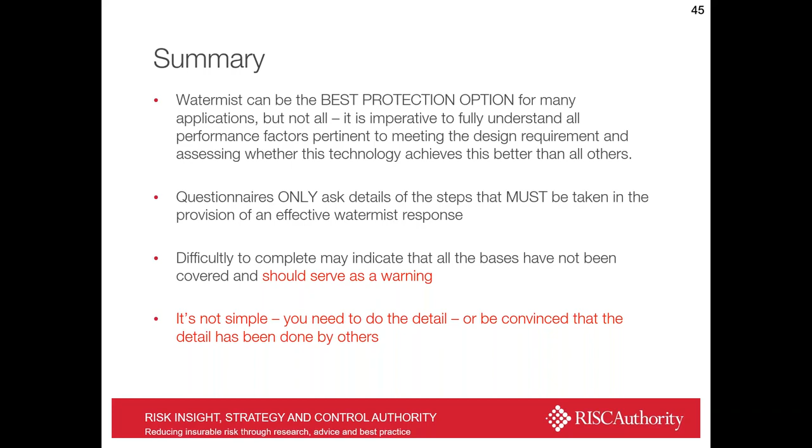I'd probably sum up by saying that watermist can be a good option for flashover prevention as a component of life safety provision, and there are some very good domestic and residential applications for watermist, without a doubt. It can be an excellent local application system for industrial and kitchen type risks.

It can be an excellent alternative to gaseous systems where enclosure integrity can be assured and fires are likely to be large. Where extinguishment of the fire is a requirement, the total design solutions to assure this, we know, can be complex, expensive, and may lack resilience unless specifically designed for.

And I guess this is the large area where we see competition happening between sprinklers and watermist systems. When you actually start to fulfill the requirements of building regulations and seek not only equivalency in terms of performance but resilience, we can very quickly see that any perceived cost saving can quickly get gobbled up trying to do the full and proper job.

In property protection applications, FPA questions the use of closed head nozzles where more than one or two are required to protect the compartment. So in small compartments where you may only have one or two heads which might be bulbed, such as domestic, residential, or hotel type environments, it's probably fine. But to protect large open floor areas with bulb systems, we still think there is more work to be done before that would be advised.

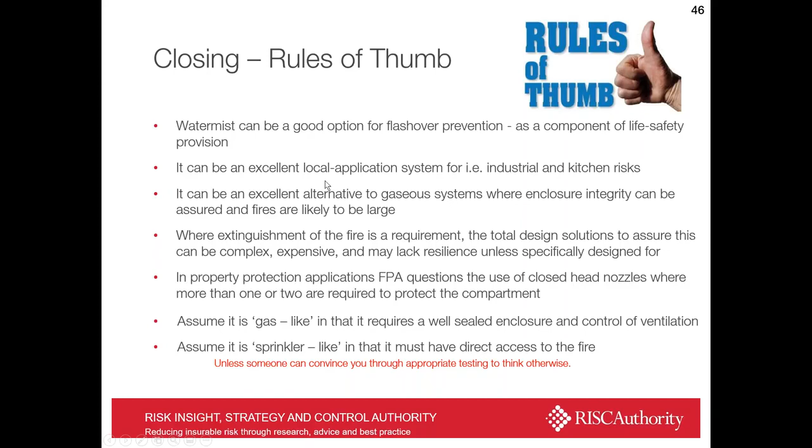Now, I think we've taken the best part of an hour to go through that. I hope it was understandable by everyone, and the slides will be made available on the RISCAuthority website.

Now, I do see I have a few questions here. If you just forgive me a little, I will just try to have a look. I think I've been sent them on email. I'm afraid we are all working from home, so let me just have a look on the questions. Oh, I think this is where I will lose the audience if I don't work this out quickly.

What is the maximum open space enclosure that the mist system is suitable for? Well, that's a very good question indeed, and I hope I've demonstrated during this webinar that it's a very difficult one to answer. For a very large fire, it can be a very large enclosure. I apologize, but that's difficult to answer straight off. That's why often we need large-scale testing to determine exactly those things, or computational fluid dynamics, which is used increasingly within the marine environment for this.